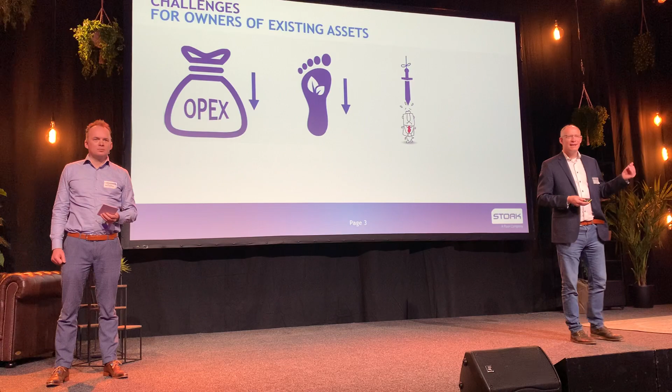It could be local, national, or international regulations that are really pushing you down, pushing you left, pushing you right. Does it end there? No. You're also being forced to keep production up to cater to rising demand for goods and products around the world. So there's very little time actually to go for a big revamp and make everything green.

Production is everything. And yet, while production is very important, there's very little money even to do something with. This could be historical frugality, it could be investors saying you can't invest, it could be that we're putting all our money into research into new green technologies — but the end result is the same: a very small bag of money for CapEx changes.

And does it end there? No. All existing facilities out there struggle with that same thing: an existing footprint. So even if you have the money, you can't just change anything you want. Now, fortunately, these aren't necessarily mutually exclusive goals. In this presentation today, we're going to share a few examples to show that this isn't the case — that you can really achieve all of these in existing facilities.

Now, where are these opportunities? Well, there are several distinct levels. First of all, there's the equipment level. This is a logical place to start — you look at your big energy users, and you can maybe reduce the friction, change the way you operate it, make some small modifications to it.

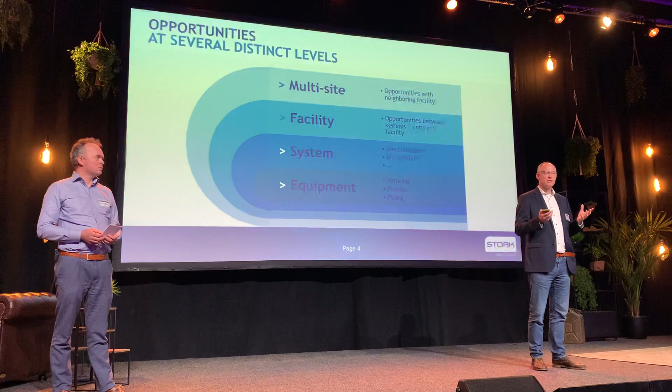And does it end there? No. More and more we notice that facilities are in industrial dense zones, and the heat sinks and sources could be with your neighbor. Those are again opportunities you more and more need to capitalize on. It might seem logical, but we see every single day clients not capitalizing on these things. Does it end there? Nope.

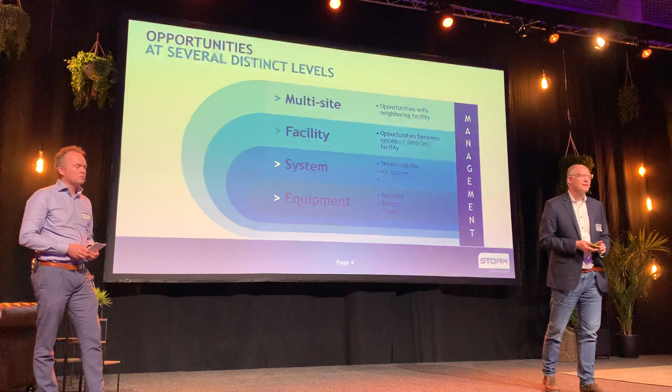There's, of course, still management. Technical folks can come up with 101 fantastic ideas on how to decarbonize an existing facility, but management needs to be there, management needs to buy in, management needs to make choices, needs to come up with business cases, validate them, and help with implementation. Those familiar with ISO 55000 will definitely recognize this: the equipment, the system, and the management have to be in balance together, and then it will work.

So what are we going to do today? First, this one: where do these opportunities actually come from? Because it's not like the engineers who developed this facility did a bad job.

And that we can come in and be a lot smarter than they were, and all of a sudden manage to make things more efficient. The reason that these opportunities exist is simply because of plant evolution.

This is all about ongoing expansion through the years. As companies are successful, they expand. Maybe there could just be more products, or different products that they all of a sudden need to or can produce for the market. It could also be changing technologies, and maybe a greener technology has been implemented, giving you wins on one end, but also some opportunities or some negative things that can be taken away in a different way.

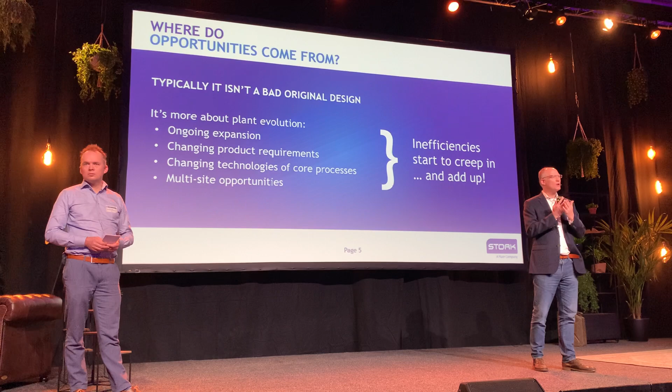And also multi-site opportunities. Some have already reached out to their neighbor facilities, and that adds a certain degree of complexity. And when that's the case, that's when you see inefficiencies creep in and add up. And those are the opportunities. Sometimes if you're too close to the situation, you don't really recognize it, but those opportunities are there.

So what are we going to do? We are going to basically go through a situation, paint the situation for you. We're then going to show which solution we implemented. We're going to talk about the benefits, and we're going to do this 10 times. And at the end, we're going to have a little recap. Now, I've been talking about 'we' a few times already, and just a little 'we.'

We are Martijn and Martijn here, we're from Stork. For those not familiar with us, we're a multinational operation and maintenance services company that works across multiple industries. We started over 150 years ago, and we were very much part of the energy transition back then, in the 1800s. And now, we're very much part of the energy transition that's going on right now, helping provide new technologies and low-cost operation and maintenance services to these upcoming wind, solar, nuclear, hydrogen, and other renewable sources.

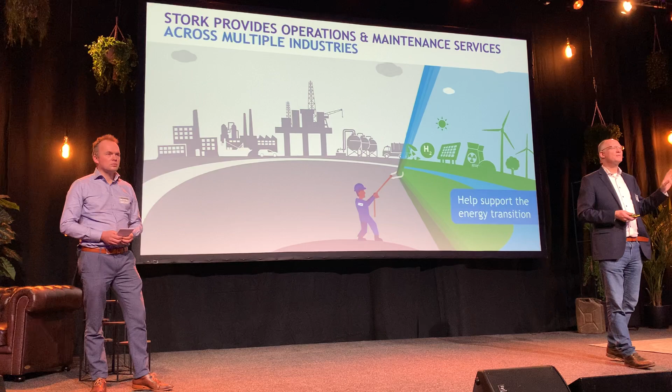But we also, on the other side of this picture, there are all these existing facilities. Stork has tens to hundreds of people at site every single day, and that provides us with a great opportunity to basically help decarbonize these facilities. We've been doing this, and we continue to do this, and that's basically where we get these examples that we'll be showing you today, of the examples that we're doing in the field at these existing facilities.

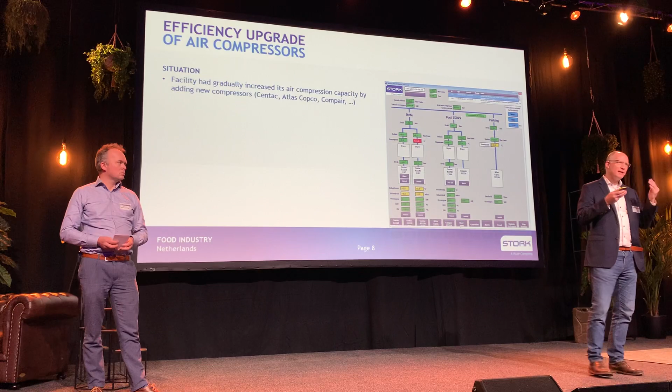So without further ado, I am now going to start with the first example, and this is related to air compressors. So this could be the glass, the food, the steel industry, lots of industries that use a lot of air. And what we see, kind of what we were mentioning already, there was a facility in this case, and they expanded, and they started off with two Centac air compressors. Business went well, procurement went out, got the best offer from, let me see, this was another Centac and a Compair.

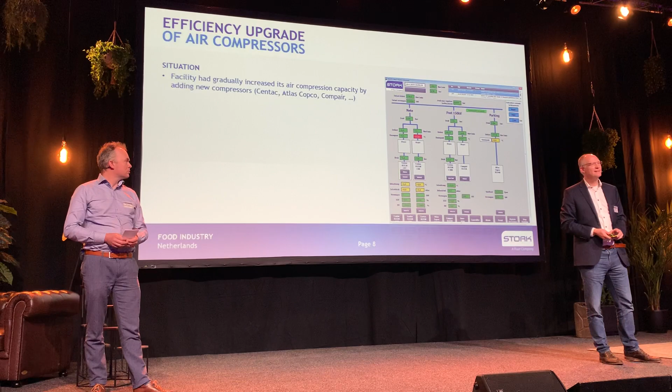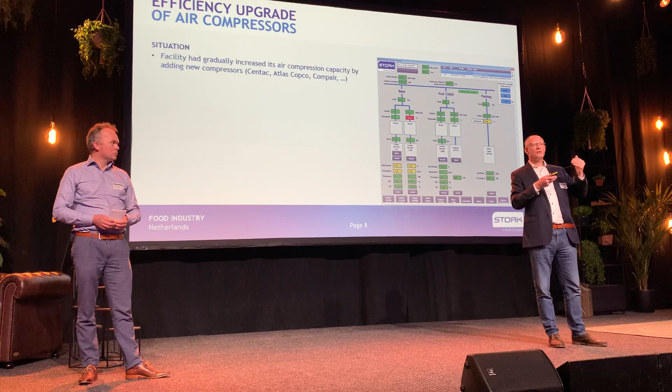Business went well, and again they expanded, this time Atlas Copco was added. But here comes the interesting thing, is that all of a sudden you notice that all these 5 air compressors are working on the same system with their own controls, and all of them are reacting on, say, an increase of the air pressure, air demand. And they all start to rev up. And when there's no demand, all of them go down, sometimes way below their normal operating limits.

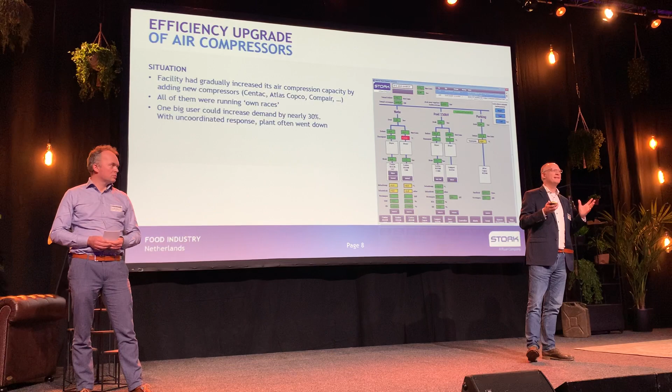So they're all actually running their own races. And there was even a user that took up 30% of the air. So when this one came online, all of them were trying to cater to that capacity, and then they started to react on the capacity increase, but also on each other. There were overshoots, undershoots, and quite often the plant would even shut down, with all the half products, waste being created there. So this was absolutely not an optimal situation.

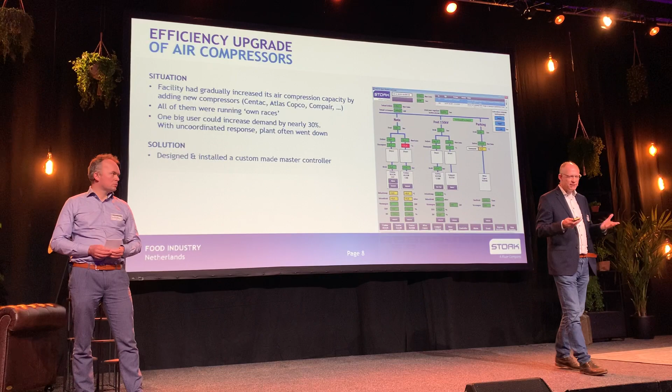And the client reached out to several companies, but they came to us, and what we subsequently did was we designed a custom-made master controller. So a controller that really stands above the other control systems, communicates with all the different compressors out there, and also communicates with the production system. So therefore it could anticipate the increase in air demand, and then simply make a decision: which compressor is best able to cater to this demand? And it could be 1, 2, 3, 4, could be all 5.

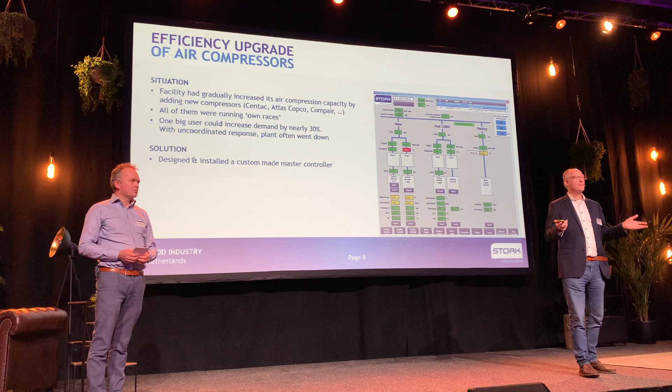And it was also linked to the client DCS, and this allowed us, for maintenance purposes which is the main reason we're at site, to shut one down safely, knowing that operation would continue smoothly.

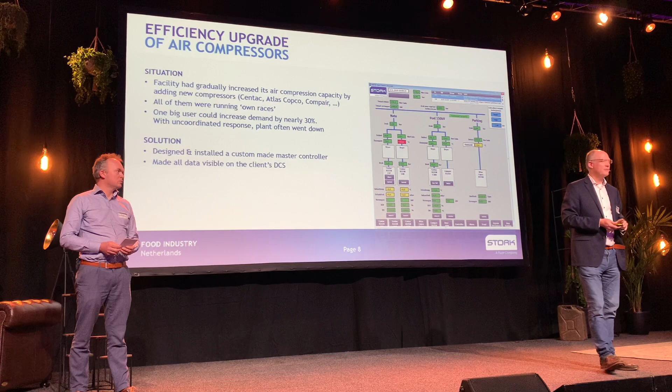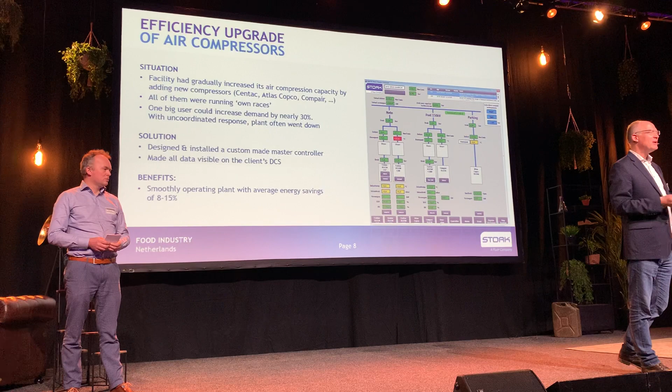Do the maintenance, bring it online, and continue the other 4. The benefits we saw - we've done this at multiple sites, and of course every plant is slightly different, that's a theme that will come up more in this presentation. But a smooth operating plant can have energy savings up to 15%, without touching any equipment, only the control systems. So a small investment, big impact that could really help decarbonize it, both from an energy point of view, but also the waste products created as the plant went down.

So this is just one example. Now I'd like to give the word to the other Martijn. The floor is yours. Yes, thank you.

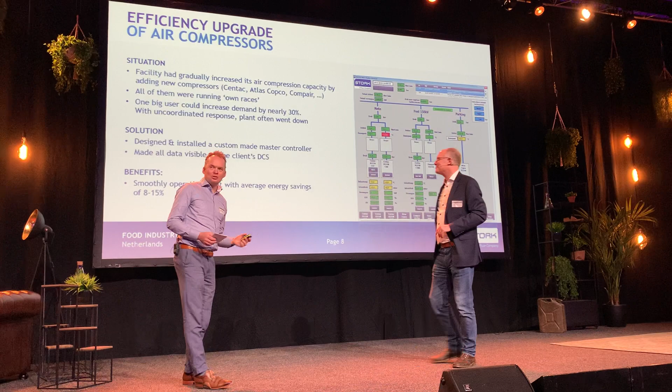Well, I will take you through just a glimpse of the many examples we can deliver and have delivered on decarbonizing existing assets. The first one I'd like to show is about condensers. Now, people who operate condensing steam turbines know that the steam turbine performance depends heavily on the pressure, or actually the vacuum, that the condenser is able to deliver. The pressure in the condenser consists of a combination of steam pressure and air pressure.

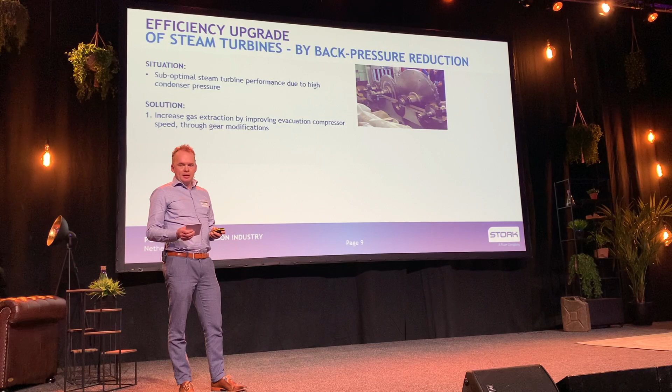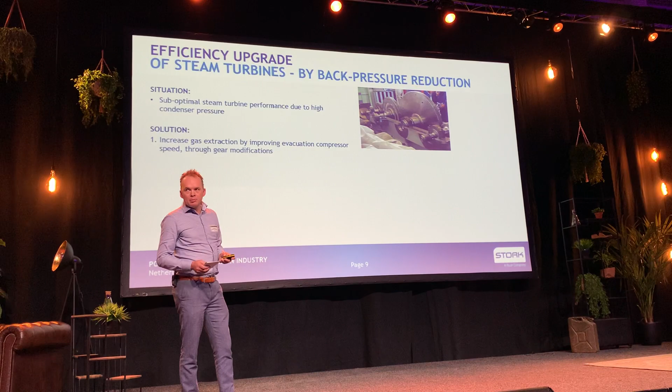Now, one issue you may have, especially important with air-cooled condensers, is that they tend to start leaking after some time. And these leaks may be hard to repair. One way out may be to consider increasing the capacity of your air evacuation compressor. We have done this at one turbine where we modified the gear ratio of the gearbox that drove the air evacuation compressor.

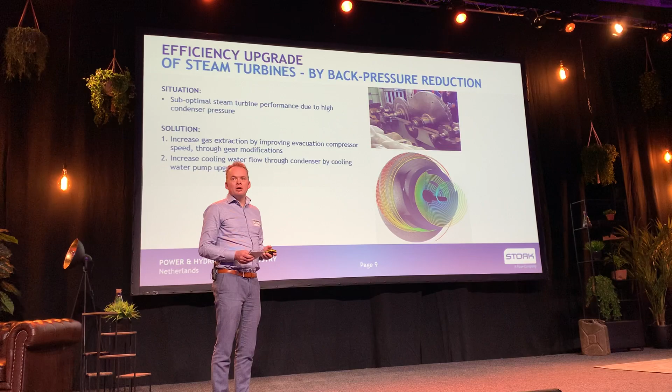We increased the capacity and that significantly drove down the condenser back pressure. A different example is, if you have a water-cooled condenser, you may want to increase the amount of cooling water flowing through the condenser. This can be a costly event, because you may also think of buying new pumps.

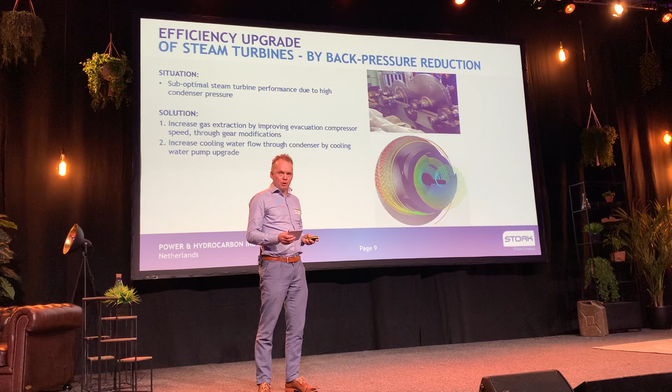But us, Stork, being a pump OEM, we did a project where we actually only modified the impeller of the existing cooling water pumps. This led to higher efficiency, higher capacity, and therefore the possibility to increase the cooling water flow with only minor modifications to the total set of equipment.

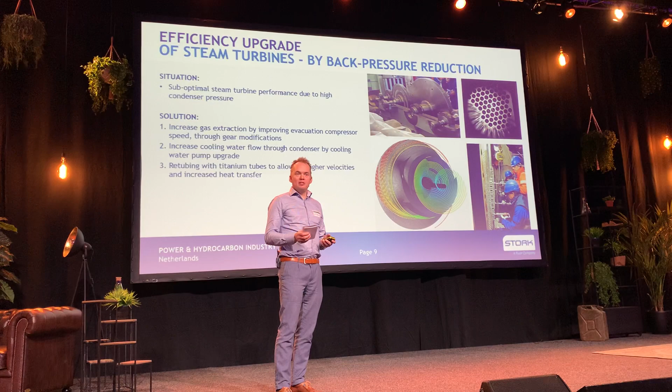Now, the last option you can do is retube the existing condenser. Many condensers are still equipped with copper alloy tubes. You can exchange these with, for example, titanium tubes. With titanium tubes, you go to thinner wall thicknesses. The thinner wall thicknesses allow for more cooling water flow, and the alloy is suitable for allowing slightly higher cooling water velocities. This in turn improves the heat transfer rate and also allows for better cleaning.

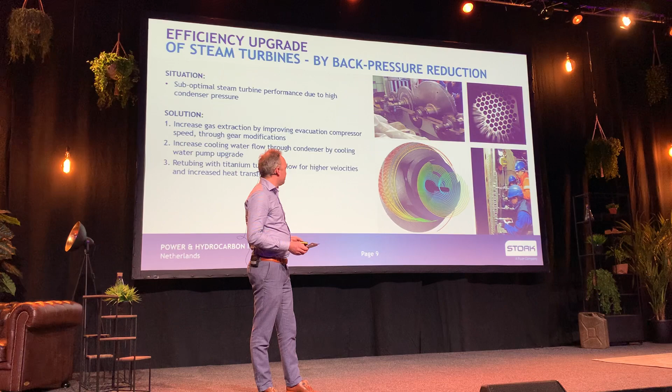So these three measures combined will all increase your turbine performance, and actually with only one of the three measures we have seen an increase in turbine performance of about 10%. So this is 10% more power that you gain without using any additional fuel.

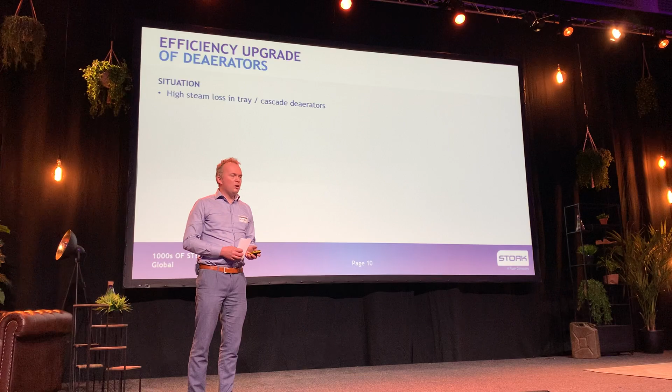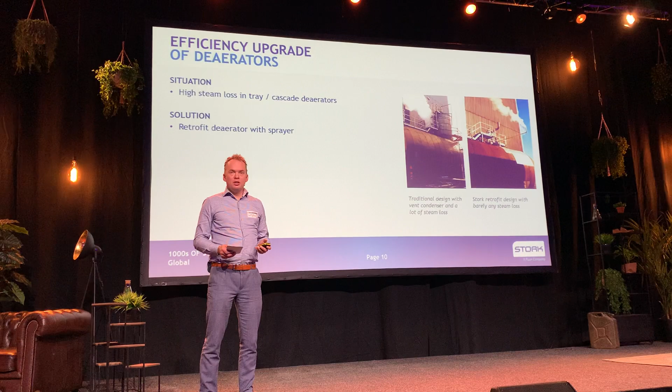The next example: deaerators. We are a market leader in designing and producing deaerators. On many of our competitors, we see deaerators which are a tray type or cascade type deaerator, and these tend to have quite high steam losses. You can see two pictures here. On the left you see a conventional tray type deaerator, which we have retrofitted to a spray type deaerator.

The advantage of this is that you can keep the existing pressure vessel, which makes up the majority of the cost of a deaerator. Piping will also stay roughly similar to what it was. But as you can see from the steam plume, there's a dramatic decrease in the amount of steam vented. This has a number of benefits.

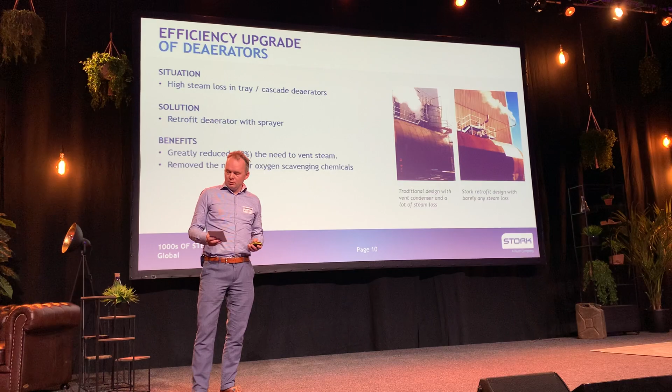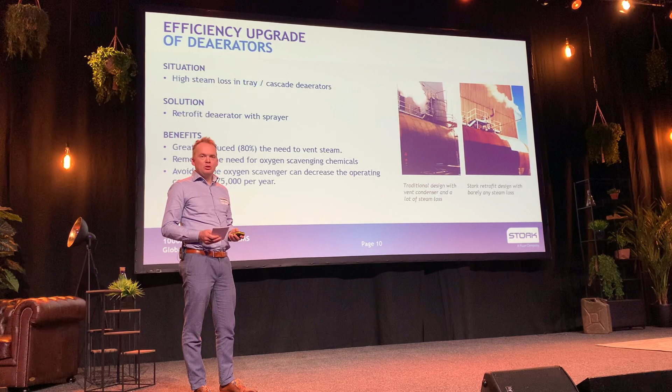So again, with the sprayer condensing much of the steam contained in the air that you would otherwise vent, there's a really big reduction, approximately 80%, in how much steam you vent unwanted. Another advantage is that our deaerator architecture works so well that you don't need oxygen scavengers anymore. These combined lead to two advantages. On a big site, we regularly see that the costs involved for oxygen scavengers are approximately 75k euros per year. But the big one, the big fish here, is of course the reduction in steam loss, which is usually multiple 100Ks per year that you save.

Next example, I call it heat sharing. It is often also mentioned as district heating. Waste incinerators - we do a lot of waste business in waste incineration.

Generally, a conventional waste incinerator designed for producing electricity only converts about 25, maybe 30% of the energy into electricity, and all of the other heat is rejected, partly through the stack, partly through the air or water-cooled condenser. But also, with these installations often being situated in industrial areas, you often have clients nearby that want steam, and often they usually produce it their own using fossil means.

So again, in this case, we had a neighboring chemical site that requires steam and used fossil fuel to generate the steam. And you can bring the two together. Now, in this case, we built a steam line of approximately a kilometer to bring high pressure steam from the waste incinerator and use it to generate slightly lower pressure steam on the chemical site.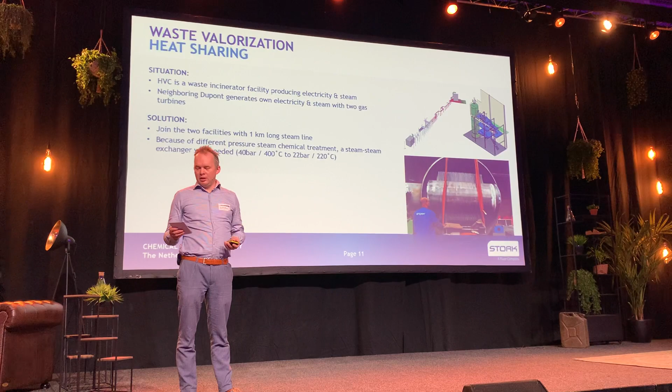And in this case, there were different chemical water treatment programs that made it impossible to directly export the steam from the waste incinerator to the chemical side. And to keep the both of them apart, we used a steam-steam heat exchanger. So this works really well.

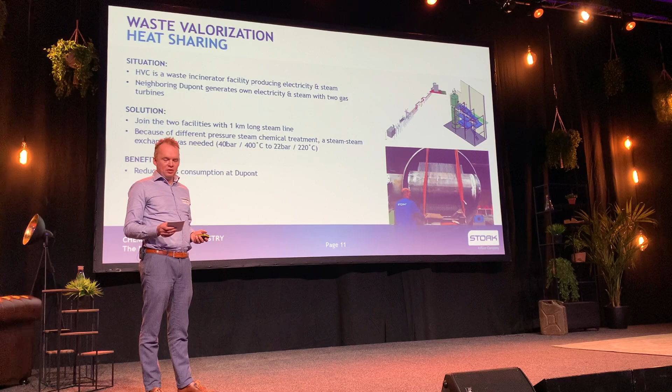This is approximately a 100 megawatt installation, and the benefits are quite clear. There's of course a very big reduction in consumption of natural gas. There's a very, very big increase in the efficiency of the waste incinerator, as mentioned. The conventional waste incineration plant converts about 25% to 30% maybe of its energy to electricity. And when you export all of the heat, you go to an efficiency of about 90%.

Last advantage, equally important, especially on the chemical side where it's absolutely forbidden to trip the steam grid, you get a more redundant steam supply for your steam system.

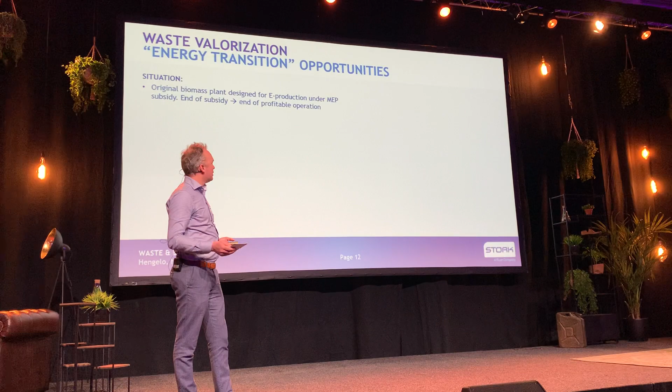Maybe just one other example I personally like. I mean, this one was reviewed before, but there's also, when you think about neighbors, it's not just industrial facilities. I believe we also helped heat a swimming pool in the neighborhood for HVC. That is under discussion, yeah. But it's just, yeah, it works really well, you know.

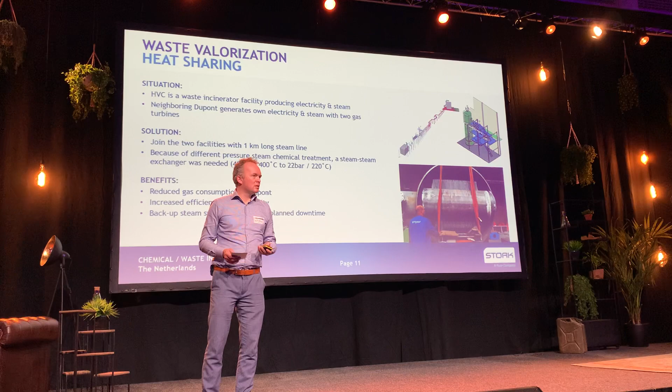The big thing is, think about your neighbors in the bigger scheme of things. It could be a greenhouse, it could be a swimming pool, there could be all kinds of other systems out there. So again, opening your eyes to the opportunities, it might be staring in the face every morning.

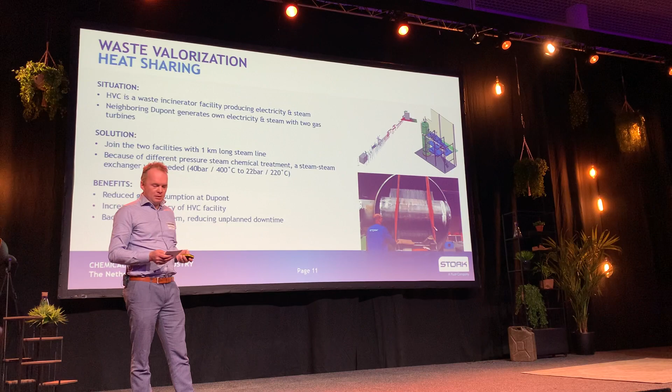Yeah, there's many factories that we work on that export, that dump actually so much heat that they can easily heat like a big city. For instance, if you take a good look at the amount of heat that Tata Steel is emitting in total, it kind of looks similar to the amount of heat that all the residential homes in the city of Amsterdam would require to stay warm.

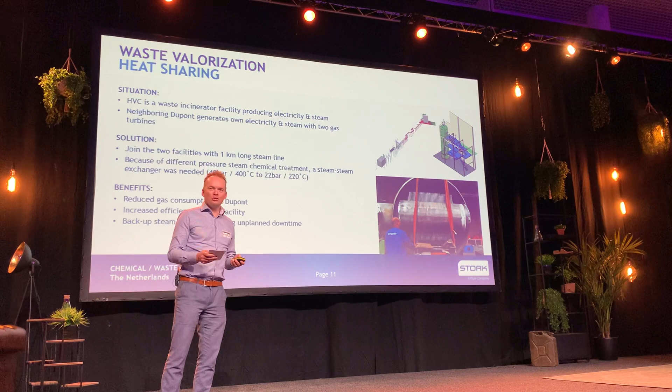Knowing that, you may wonder why they even still continue subsidizing heat pumps for local use and not just put that big pipe there to bring the heat there.

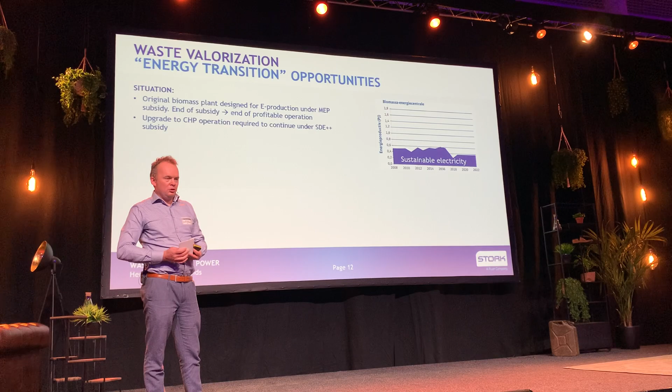Next example, quite similar actually. So again, heat sharing. We had a biomass plant, and this one has to do with the regulations. So everybody constructs their installations in the end in order to make money. You have to run your business. And in some businesses, the business case depends on subsidies.

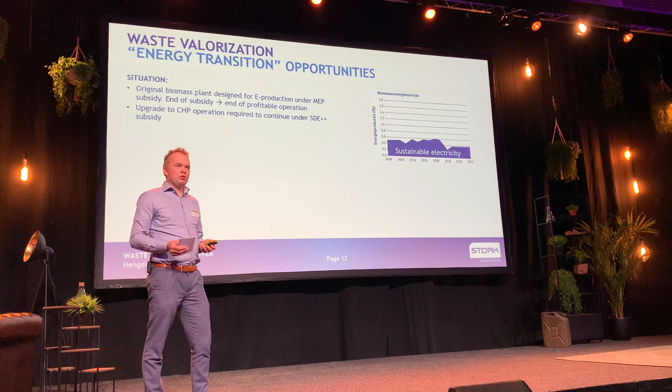Now, this plant was constructed to run optimally making use of the MEP subsidy, which was aimed at producing sustainable electricity only. This MEP subsidy scheme has a limited running time. So you construct the installation, you operate it, and after, you know that after some years the subsidy will be gone, and then, well, that may just be the end of the financial lifetime of the installation as it is.

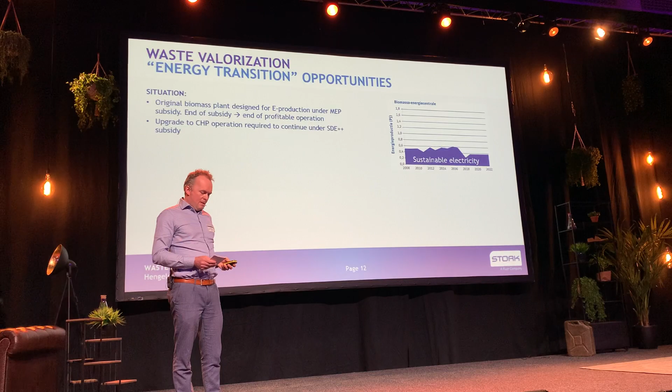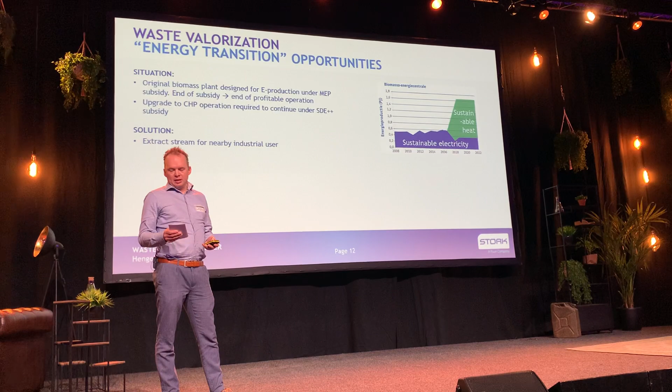That is of course a pity, because you have a really good working biomass installation. So we looked at new ways to make money, and in this case they wanted to modify the operation to cogeneration operation, supplying heat to the nearby district heating grid. So they modified the installation from electricity production only to CHP, combined heat and power. What have we done there?

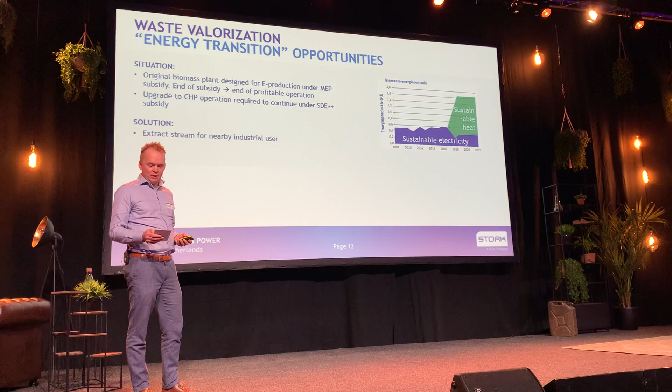We have modified both the boiler and the steam installation. A new steam turbine was installed suitable for extracting the maximum amount of heat and condensing only the minimum amount of steam in its own condenser.

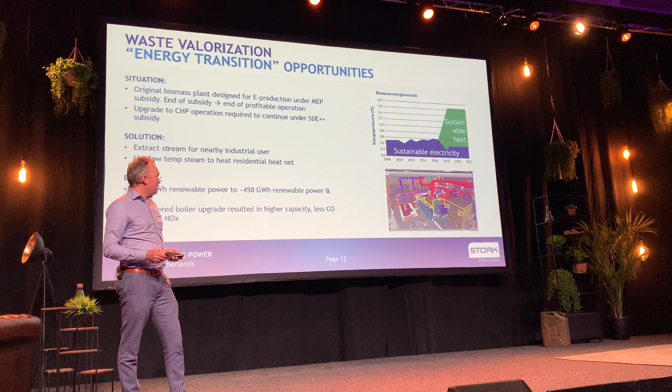So we supply the steam to a nearby industrial user, and additional low temperature heat was extracted to increase the amount of heat that we take from the biofuel. Now, the total amount of energy that is exported has tripled, if you take a look at the blue and green graph. That is of course very impressive.

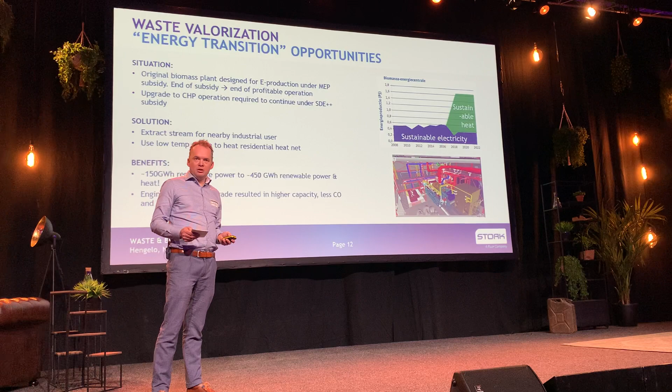Other benefits of the upgrade we did on the boiler: the capacity was increased by about 10%, and even though that would generally result in less optimal combustion, we actually optimized the combustion and made sure that less carbon monoxide is emitted, and also less nitrogen oxides were emitted. For those of you who've seen political discussions on being allowed to build in the Netherlands, we have big problems with NOx emissions in our nation, so this was a big advantage.

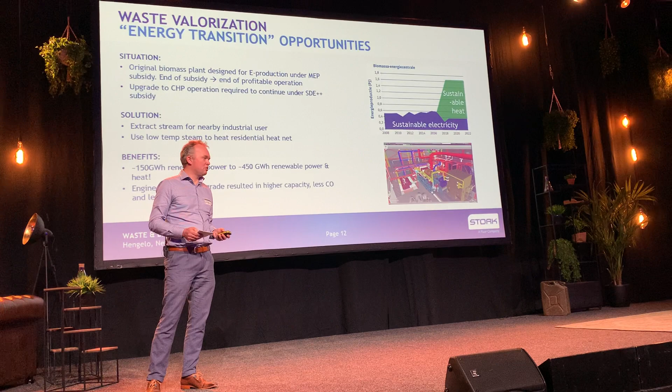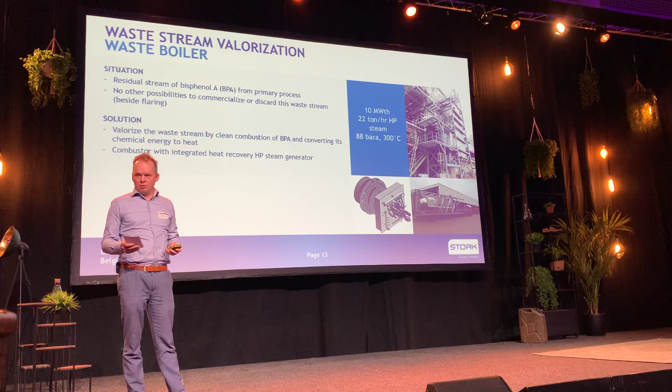What did we do there? We helped the client valorize the heat. With us being both a boiler and a burner OEM, we designed and constructed a new combustor that produced high pressure steam in parallel to the existing steam generator. So we did not only construct a new self-working combustor with heat recovery, but we actually coupled it to the existing boiler to make sure the high pressure steam was at the correct conditions to supply it to the existing steam turbine.

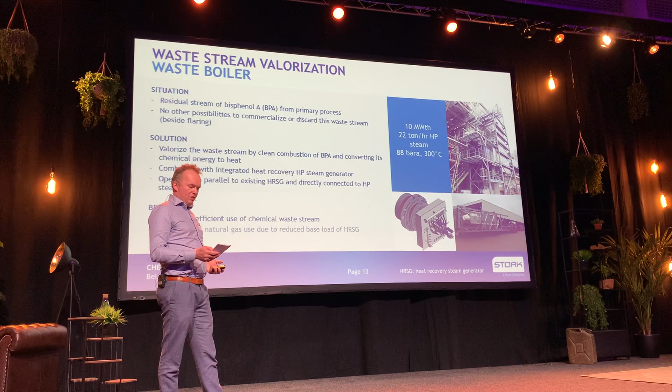The benefits of this solution: clean and efficient use of the waste stream, and further advantages - with this being a 10 megawatt installation, a big reduction in the use of natural gas. And this of course reduces the carbon footprint of your plant.

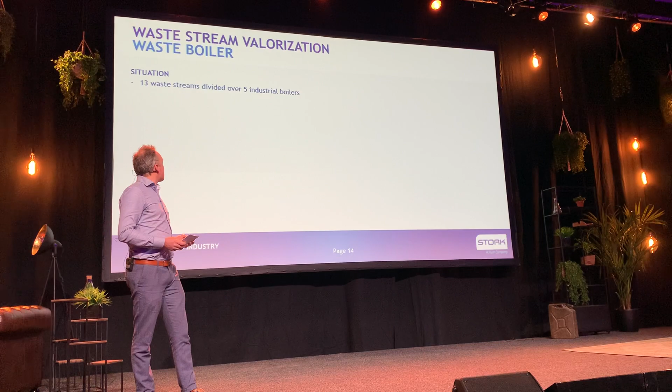Similar example, also with a lot of waste streams. The previous example was only about using one waste stream, but many of the more complex sites have many waste streams. This client had a total of 13 different waste streams, which had been divided over 5 boilers. Now, firing the waste streams on a boiler is in some ways similar to flaring them - quite often these waste streams don't have a high heating value, so you need natural gas as a support fuel to make sure you have a well-sustained flame and get nice, clean, complete combustion.

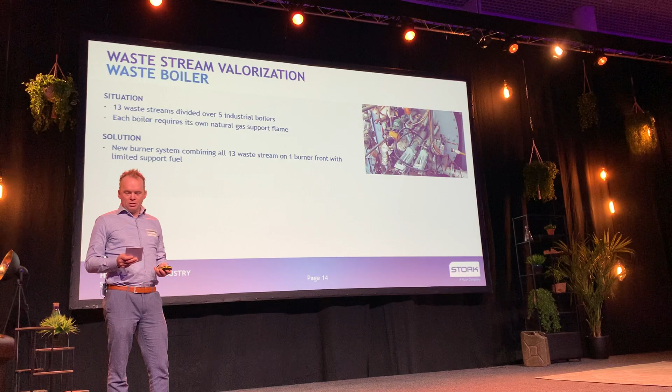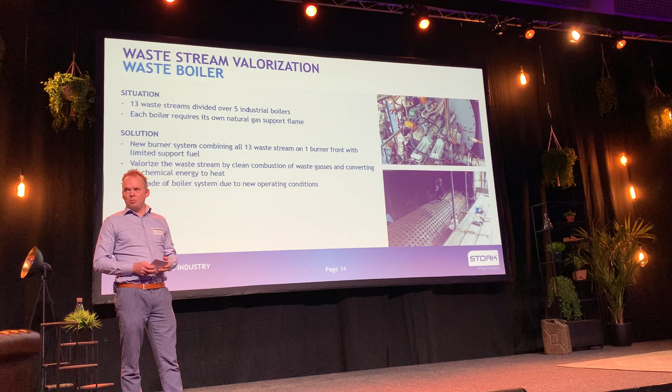What did we do? We engineered and constructed a new burner system that combined all the fuels on one boiler. So we have a single combustion system that combusts 13 different waste streams on a single boiler. This of course avoids the natural gas consumption on the other 4. Now we only need one stream of support natural gas, and we also upgraded the boiler to cope with the new operating conditions that arise from burning this new combination of fuel.

The benefits of this are clean and more efficient use of all the waste streams, reduction of the natural gas used as a support fuel, and of course it results in a greatly reduced carbon footprint.

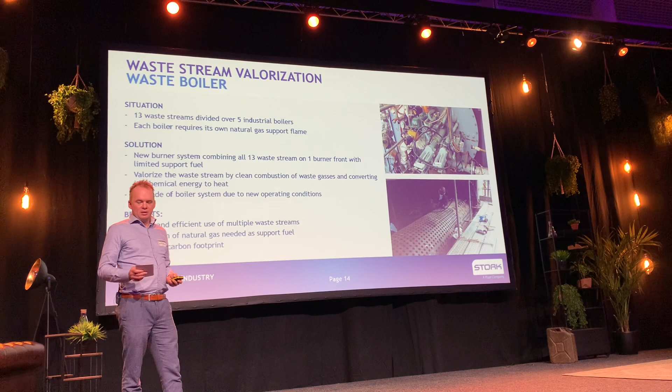Then my final example, quite a modern one. With ever increasing wind and solar power being installed, we get a very dynamic electricity market, with electricity prices often dropping below the gas price or even becoming negative. Now this gives you an opportunity to reduce your carbon footprint at times when there's an excess of electricity available. Another thing clients often want is an additional backup for their steam or hot water systems in case their existing facility fails.

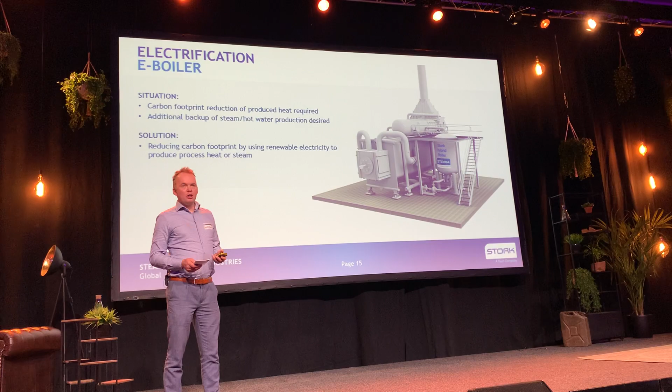What's the solution here? You can reduce your carbon footprint by using excess electricity on the grid to generate your heat. And the heat may then be hot water or also steam, even superheated steam.

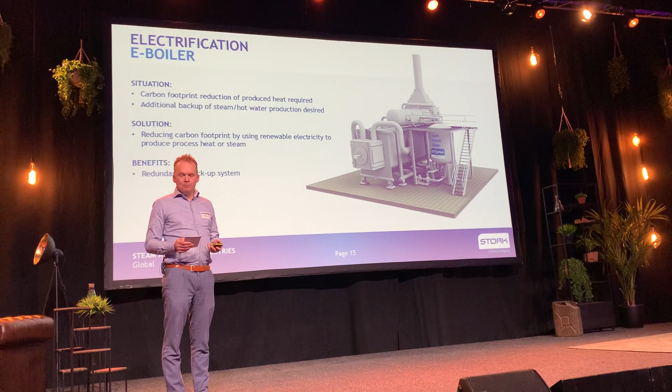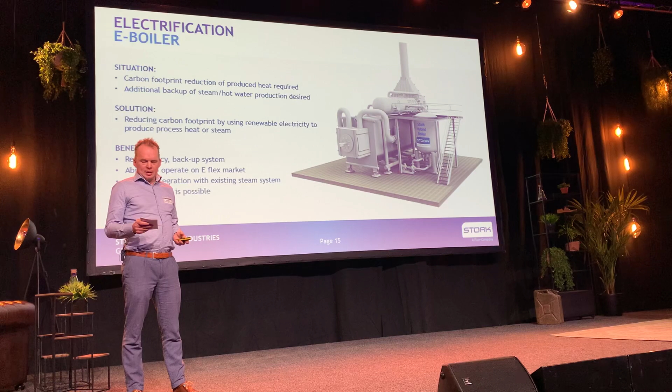The benefit of this is you get low-cost steam at times when electricity prices are low, and you may even get paid to produce steam using the electricity. It gives you additional redundancy in your system. The integration in your steam system, or even integration with an existing boiler, is a cheap option to keep supplying superheated steam. And superheating is still possible.

Well, Martijn, this was my last example. Okay, I'd like to hand it to you. Thank you. Martijn has a penchant for touching stuff and adding big pieces of equipment or changing the piping, so I'm going to try something different. This is the last option here: ways you can enhance your efficiency and reduce your footprint without even touching the facility, through predictive maintenance.

The case I'm going to talk about is a petrochemical client in the south of the Netherlands that many of you will know. I asked the client to give us their data, because they have some furnaces that keep going down - they're the bad actor. Let's see if we can get something from the data you've been sitting on for so long, because every time you go down, you're flaring, which is not good for the environment, and you get waste products and half products during the unplanned shutdown.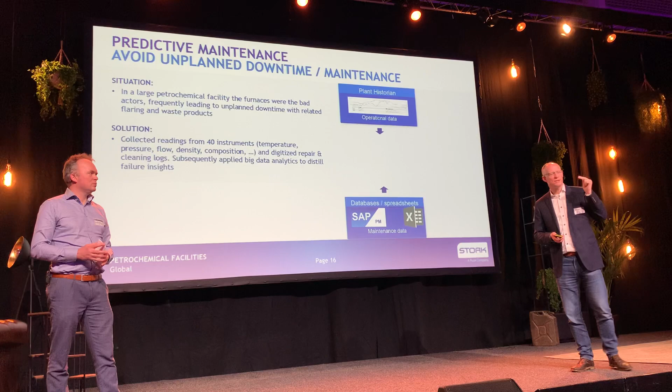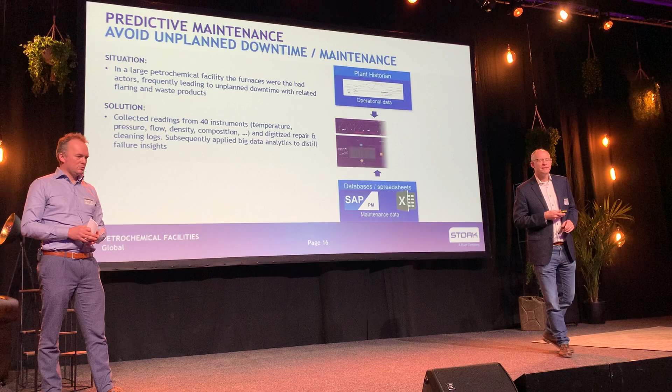So what did we do? We collected readings from existing instruments - we didn't install new ones. We would have loved additional information, but we just looked at what existed: pressure, flow, temperature, composition, density. We looked at the existing signals they had over the past years in their historian, and we also digitized their repair and cleaning logs. Sometimes we could get it straight out of the SAP system, sometimes we had to take manual logs and digitize them. Once we had that, we could put it into some very powerful data analytics tools.

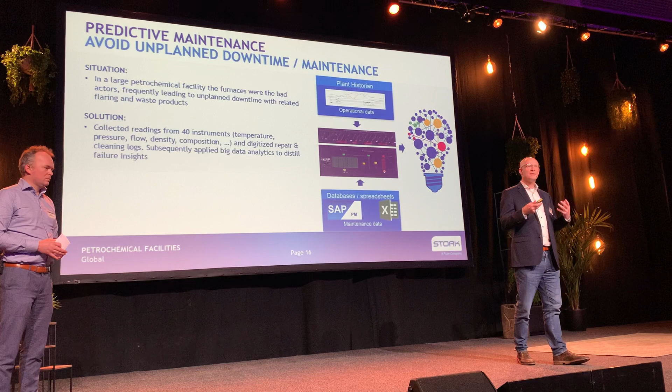In this case, we used AspenTech's Mtell product, and we put some of our experts there. It's not just that you put it in a black box and out comes the answer. But the answers certainly came, because once we started analyzing the data with these tools, it gave us much deeper insights into what was happening inside those quite complex furnaces.

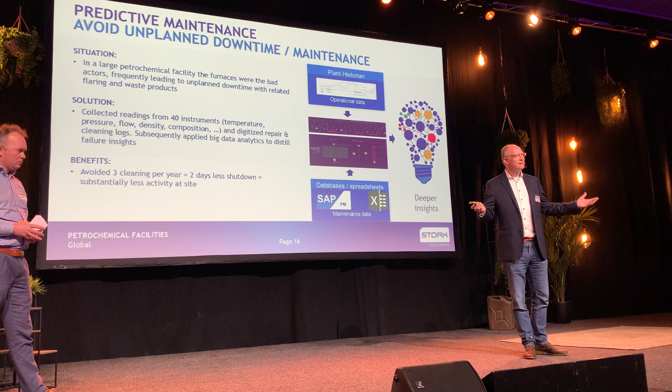The benefits were, first of all, around the 3 cleaning exercises - we just couldn't understand why they were needed. We did not see an effect whether they were done or not. We analyzed it, and all of a sudden the experts looked at each other and said, 'oh, of course that makes sense.' So 3 cleaning exercises per furnace became less - 2 days per furnace less shutdown, more production revenues, and less activity on site. That's also a carbon footprint reduction right there.

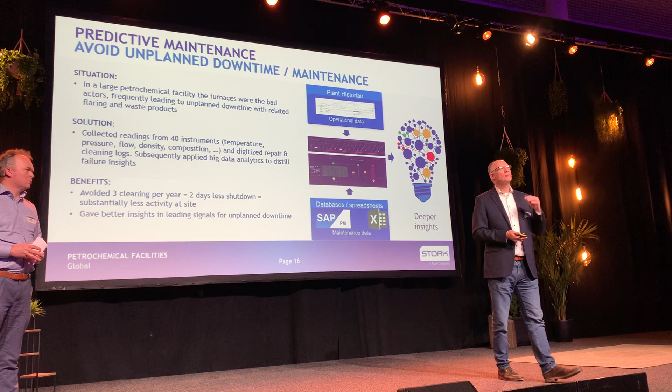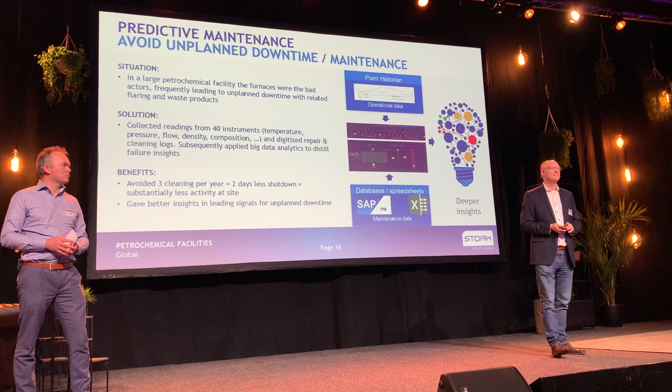On the other side, the insights confirmed some suspicions we had about correlations, but we could never positively confirm them. Now, backed up with the data, we could positively say: if this happens, a shutdown will happen so much later, allowing you to put preemptive measures in place, or even avoid the unplanned downtime. So a very powerful testament, guys: if you're an existing asset owner sitting on a historian full of data, don't just let it sit there - let it be analyzed by a company who can assess that data and help you get these deeper insights.

So we've talked through 9 different options, and of course we could share a lot more. I guess the big question is, which one will work for you? Maybe already you've heard something and thought, 'this sounds familiar, maybe I have this problem,' and then you've already got your solution. But there are often many more solutions out there, maybe staring you in the face, that you've never really looked at because slowly they've crept in.

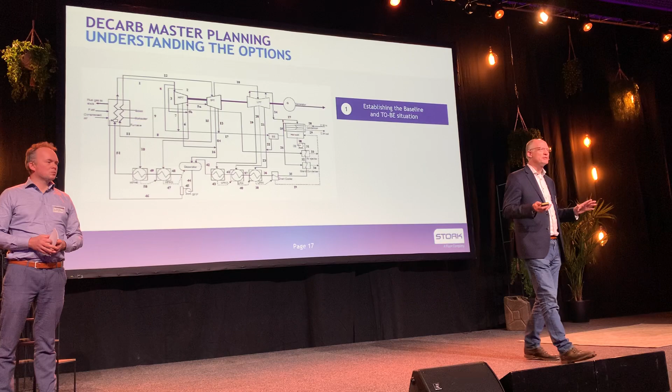We would like to suggest that really the best thing is to establish a baseline. Look at your whole facility, and not just your facility, but also your surroundings - who knows which light bulbs could go off there? And really also address the to-be situation. If your asset only has another 5 years of life cycle, your priorities and aspirations will be different than if you still want to operate that facility for another 15 or 20 years.

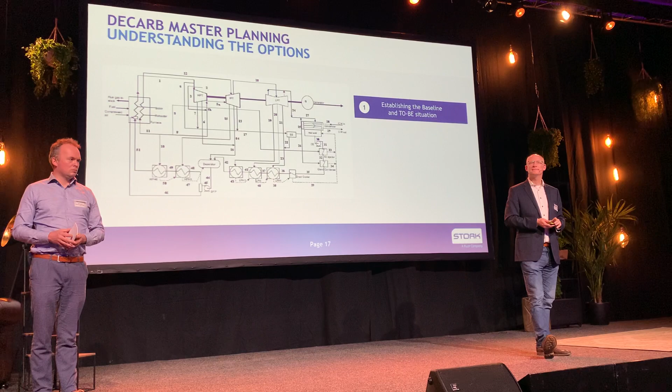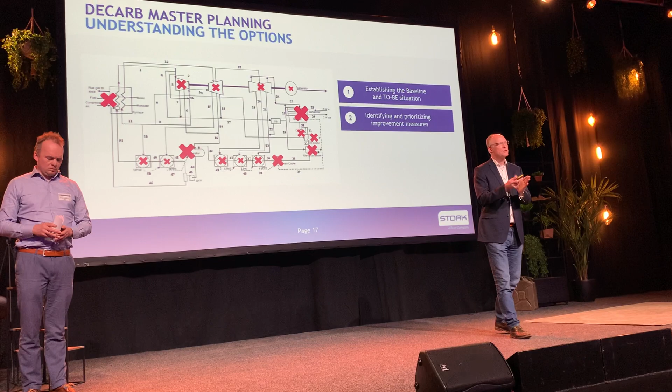Once you've done that, look for those opportunities. Map them out diligently, every single one of them, the big and the small. Sometimes those small ones can really add up, and maybe those small ones fit in your budget, or maybe they fit in your scheduled downtime. There's all kinds of reasons why you eventually need to select a few and prioritize those for the first pass through.

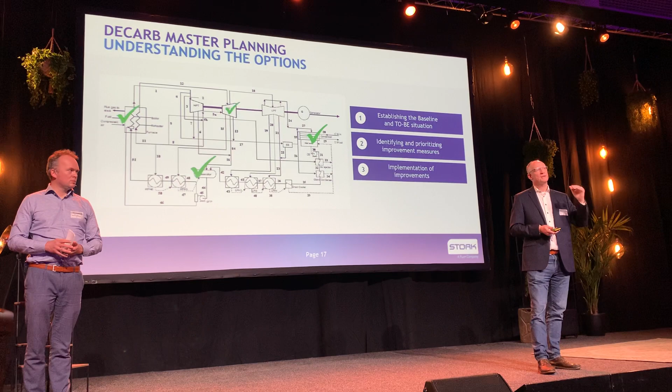The next phase is, you've got to have that mindset of actually doing it. This requires a totally different mindset: execute, execute, execute. So often the good ideas just pile up and we say we'll do it the next turnaround, or the next turnaround. So the implementation is so critical.

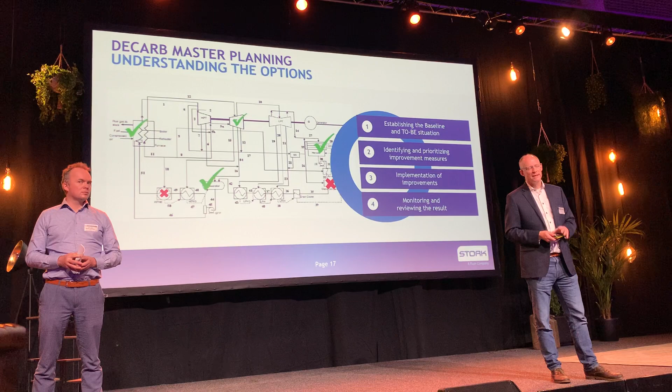And the last one is, it's never a once-through effort. There's always more opportunities out there. It's a roadmap, basically, a journey to decarbonize your existing asset. So this road mapping is most probably the best place to start.

So, staying competitive in the greening world, that was the title of this presentation. I hope we've shown that there's lots of opportunities, best discovered if you start off with a very thorough road mapping. Don't just go for that first big shiny thing out there that could blow your budget, not fit in your turnaround window, or not fit in your existing footprint. Really go through that effort of doing the whole master planning.

Look at those efficiency opportunities, efficiency upgrades. We shared a few here on the control systems, but also turbine reblading, the deaerator example, adding more insulation, and all kinds of different ways that you can increase the efficiency of your asset.

We also talked about waste valorization. It could simply be heat exchange, but it could also be taking that remaining calorific value and turning it into steam and turning it into something useful.

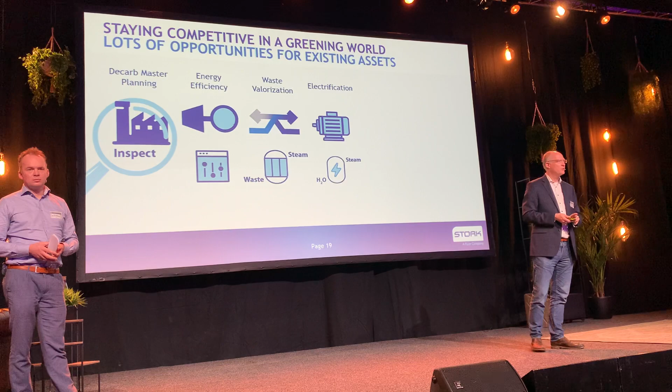It could also be electrification. We talked about the e-boiler, but it could also be changing out your drives from steam turbines to electrical drives. It could be electrical heaters and mechanical vapor recompression. There's all kinds of electrification options out there for you, of course powered by green electricity.

We didn't touch on this one: fugitive emissions. There's still a lot of facilities out there that are leaking. Maybe a little less in the Netherlands, but every time we go to new facilities, we're surprised at how much leakage there still is. Good flange management, but also taking care of the seals, especially around tank farms, are great opportunities to avoid those emissions, especially if they're methane. They should be tackled. It's not a coincidence that at COP26, methane emissions was really noted as one thing we need to all collectively stop.

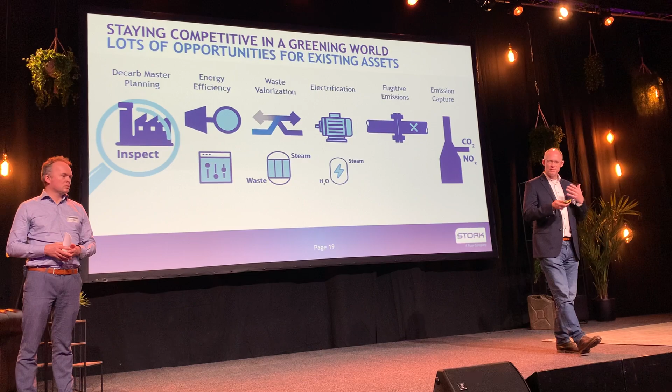Also another topic we didn't touch on, but it's very effective to still capture the pollutants before they leave the stack, whether it's CO2 or NOx. And we also shared with you about the predictive maintenance opportunities.

So this is kind of like a little recap of the categories as we see them in Stork, and the ones we always look for as the low-hanging fruit as we're assessing clients.

So to really wrap it up, the recap that we promised: I trust you agree that there are lots of ways to decarbonize existing, especially ever-changing facilities. Again, it's not a bad design, but it's through the changes over time that these inefficiencies have crept in. And they can really help you decarbonize and also, quite often, drive down your footprint.

And as you're taking that step back to really look at your whole facility, make certain that you really get a multi-discipline crew in there. Not just people who love molecules, not people who love certain pieces of rotating equipment, but also the process people, the electrical people, get them all involved. The control systems people, get them involved too, because you don't upfront know where the biggest benefits will be for you.